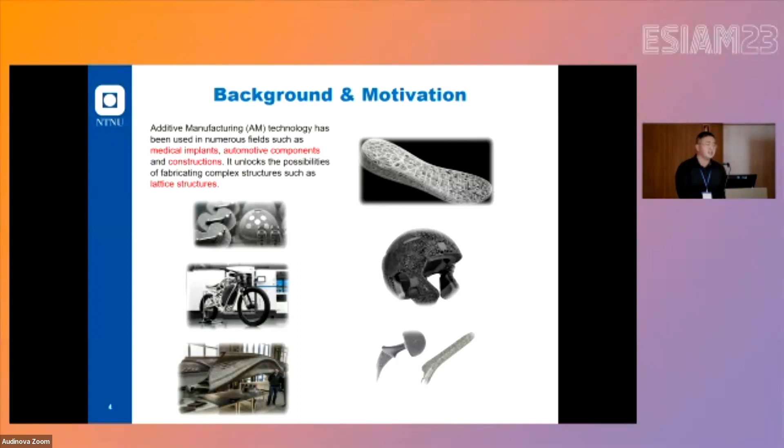So let's look at the background and the motivations. As we all know, AM technology has been used in numerous fields and has a lot of applications such as biomedical implants, automotive components, and constructions. And because of the technology, it unlocks the possibility of fabricating complex structures such as lattice structures. As we can see from the images here, we have insoles, helmets, and also joints for real applications.

Lattice structures in general can be classified into 3 categories: strut-based, skeleton TPMS-based, and sheet TPMS-based. In this work, we will focus on skeleton TPMS-based, and we choose 2 structures, gyroid and the TPMS Schwarz primitive. Why these 2 structures? Because gyroid has very high energy absorption and strong load bearing capacity under compression load. The primitive has very good strength and stiffness under compression as well. So we want to combine those 2 structures and see the mechanical response.

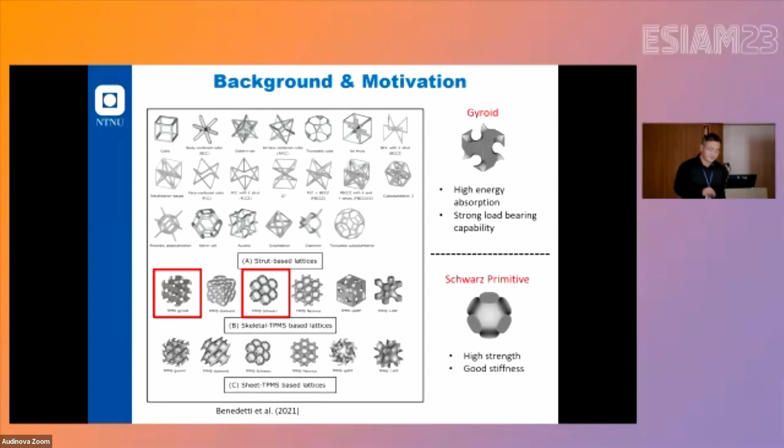The premise is that adjusting the topological features towards the design of multi-morphological lattice can offer a very high potential towards fine-tuned mechanical response. So the aim of this work is to understand associations between the unit cell topology arrangement and the overall mechanical response under compression. There are some critical issues that can affect the mechanical performance. As you see in the images below, one is the thickness of the joints, and also the interface morphologies can affect the mechanical response.

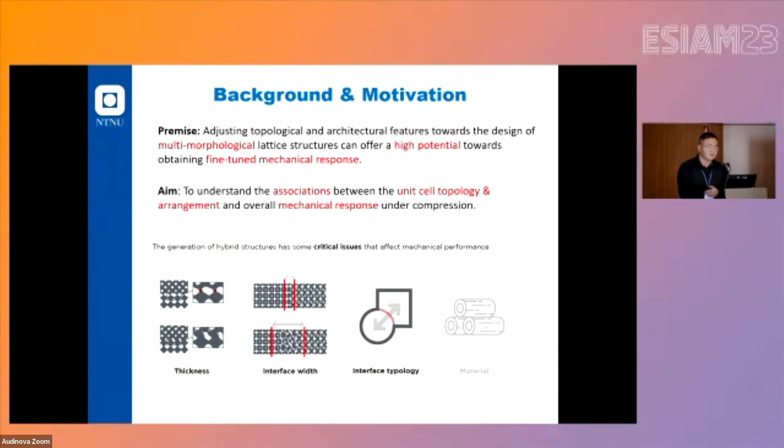Materials and methods. In this case, we have 4 categories for the arrangements. First is the linear transition along height: the primitive structure on the top and the gyroid structure at the bottom. Second is the linear transition along the width: the gyroid structure on the left and the primitive structure on the right. Third is the diagonal transition: primitive structure at one corner and the gyroid structure at the other corner. The last one is the localized diagonal transition: the primitive structure stays in the middle and the gyroid structure stays at 2 corners.

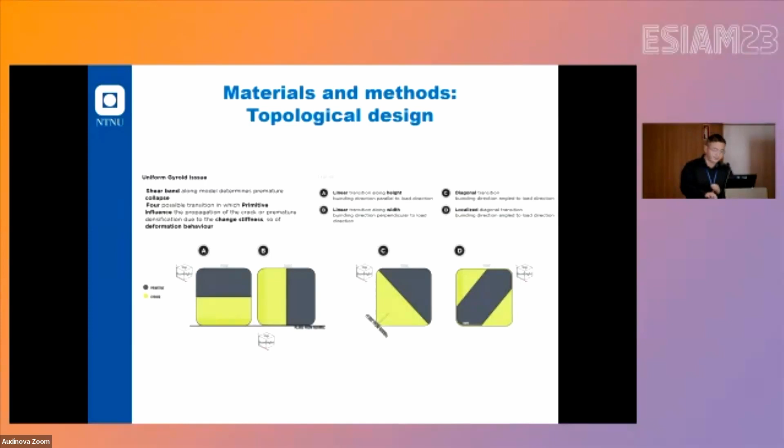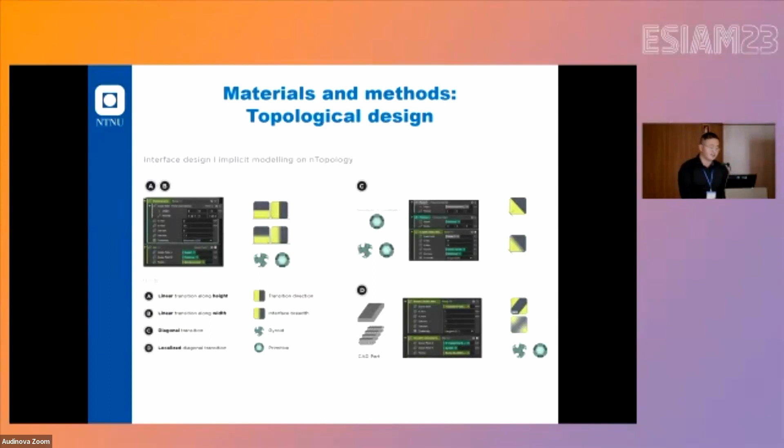All the design work was done in nTopology, and we made sure that the transition area was smooth enough, so there was no abrupt surface change for the entire structure. As I mentioned, there were 4 categories. The first is the linear transition along the height, and the second is the linear transition along the width.

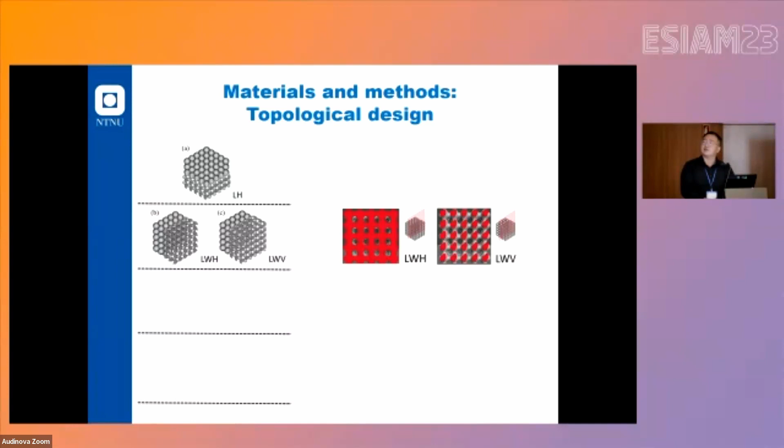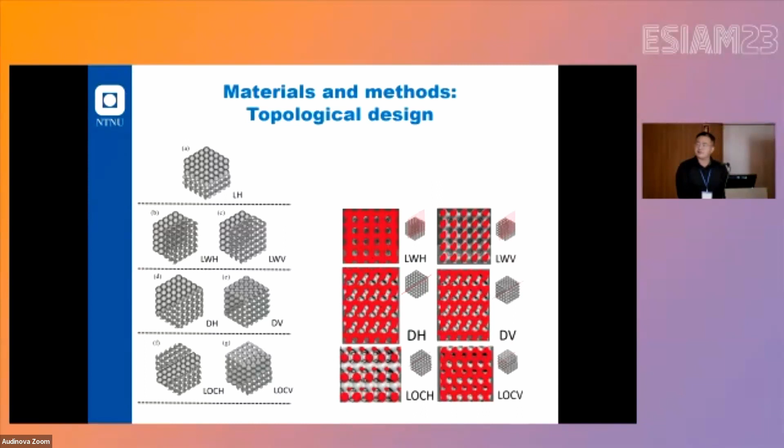In this case, we have 2 geometries, either with horizontal waves on the surface for gyroid or vertical waves. But it is important to know that the direction of the waves is not the key factor here. The key factor is that the interface morphology is different, as you can see from the images on the right. We also have the diagonal transition with horizontal and vertical waves. As you can see, the morphology of those 2 structures is the same. And for the localized transitions, we also have different morphologies.

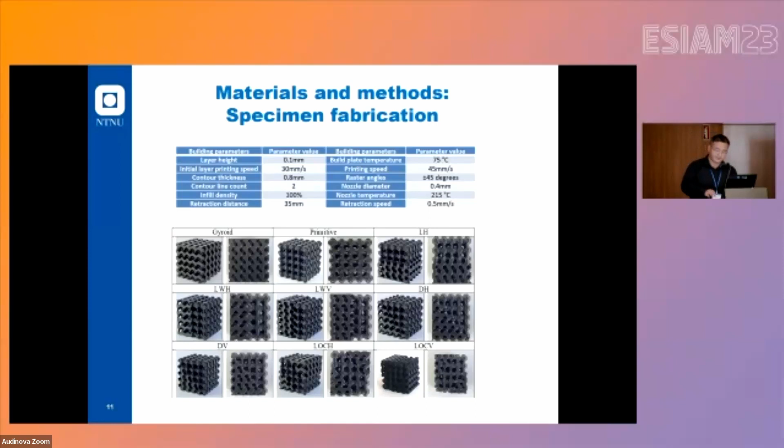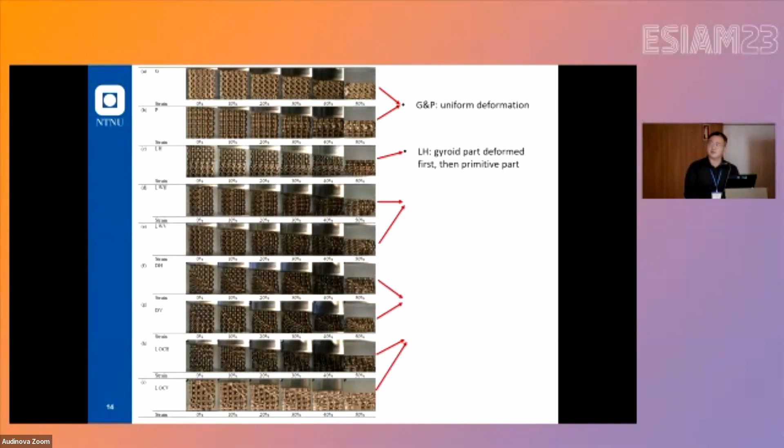So for the first 2 uniform structures, gyroid and primitive, we can see that during the compression there is basically uniform deformation. And for the linear height, the gyroid part starts to deform first, and then the primitive part. And for the linear transition with horizontal and vertical waves, we can see overall there was both global uniform deformation, and the middle layer started to deform outwards horizontally.

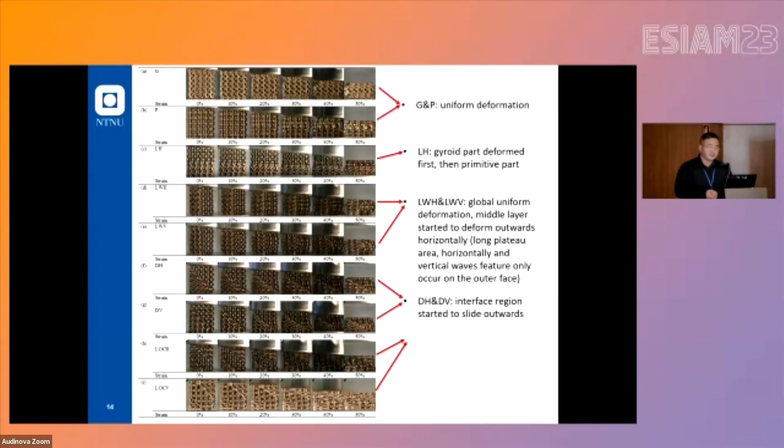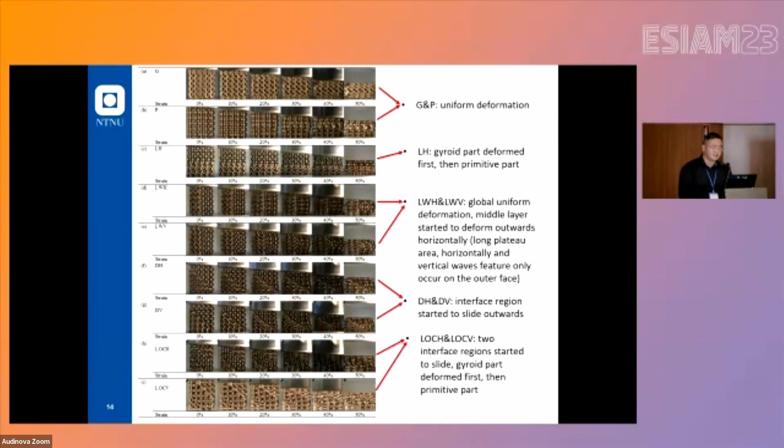And for the diagonal structures, the interface region started to slide outwards during the compression process. And finally, for the localized structures, 2 interfaces started to slide. Also, the gyroid part started to deform first, followed by the primitive part later. And these are the mechanical properties calculated for every structure: the stiffness, yield stress, first peak stress, as well as the energy absorption.

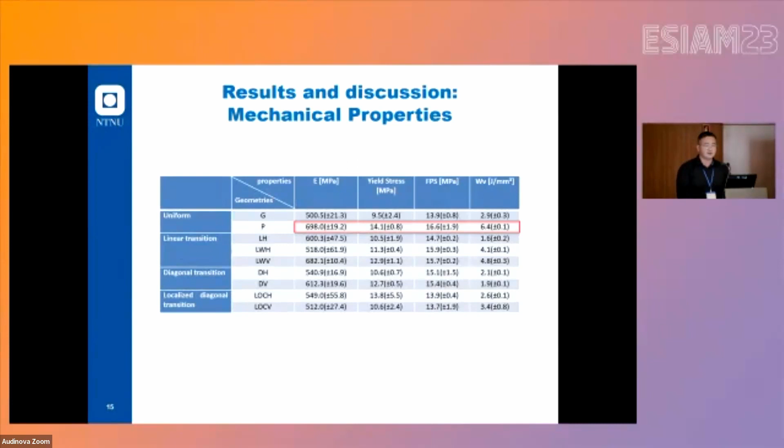As we can see, the primitive has the best mechanical property, but it is not clear to just compare all the geometries together. So we need to separate them into different groups to have a clearer comparison. First was the linear transition along width. In this case, we have 4 geometries, 2 uniform, and then the linear width with the horizontal and vertical waves. Both of these geometries display higher load bearing capacities than gyroid, but lower than the P. So both of them stayed in the middle. And the LWH has lower stiffness, yield strength, and energy absorption compared to the LWV.

Second, we compared 2 uniform structures with the structures along height. As I mentioned before, during the compression, the gyroid part got deformed first and then followed by the primitive part. So this structure has a relatively short plateau region compared to the gyroid and the primitive structure. And for the energy absorption, because we calculate energy absorption up to 50%, this structure has a lower energy absorption than the gyroid, because it only considers prior to the densification of the P structure.

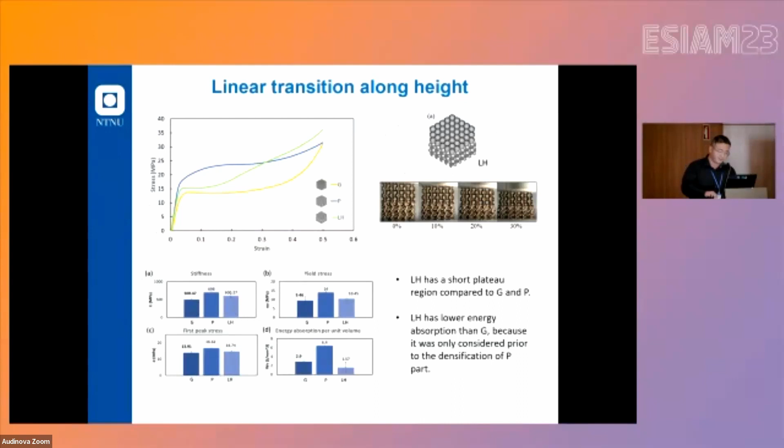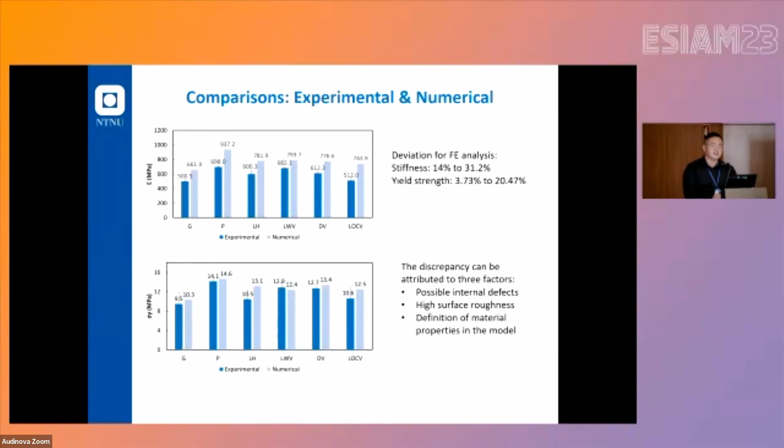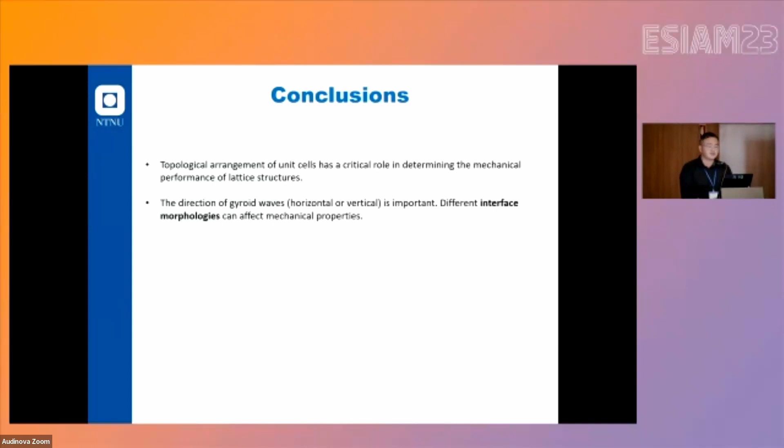And conclusions. As we can see, the arrangement of the unit cell has a critical role in determining the mechanical properties of the lattice structure. The direction of the gyroid waves, either horizontal or vertical, is important, but the real reason behind that is that different interface morphologies can affect the mechanical properties. And there is a high association between the mechanical response and the orientation of the contact interface.

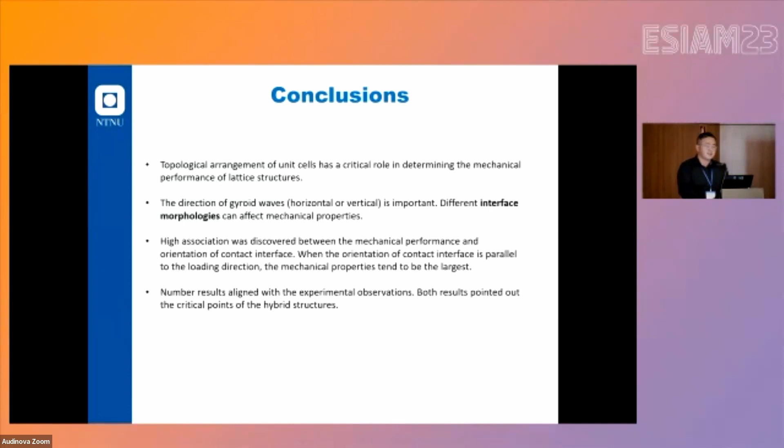Either it's parallel or perpendicular or to a certain angle. So when the contact interface is parallel to loading directions, the mechanical properties tend to be the largest. And also the numerical results aligned with the experimental observation. Both results point out the critical points of those hybrid structures.

And finally, further research can be explored for other potential arrangements beside the 4 arrangements we have done before. So it can be explored for different other arrangements as well.

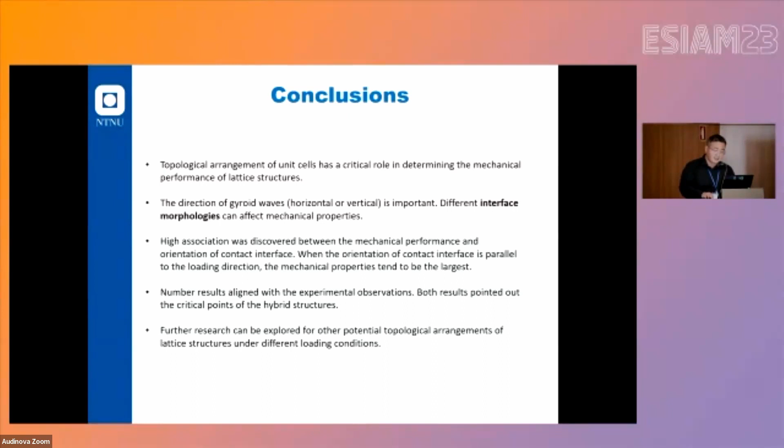Very interesting talk. Thank you. Are there any questions for the speaker?

Thank you for the presentation. It's very interesting. I'm mainly curious about how you did the interface between the 2 structures. I know that in that software, there's some options like you blend the geometry somehow. And I would also like to know if there are any restrictions of your geometry, like you set the unit cell size as identical, something else.

Yeah. Thank you. So the software we use to design the structure is called nTopology. So it's a software specifically used for designing lattice structures, and it's very easy to design structures like that. The only challenge is because we have to merge those 2 uniform structures together, so either primitive or the gyroid. So when we had the first design, there were some abrupt changes in the interface. So that's not good for the structure. So we need to make sure the transition areas are as smooth as possible.